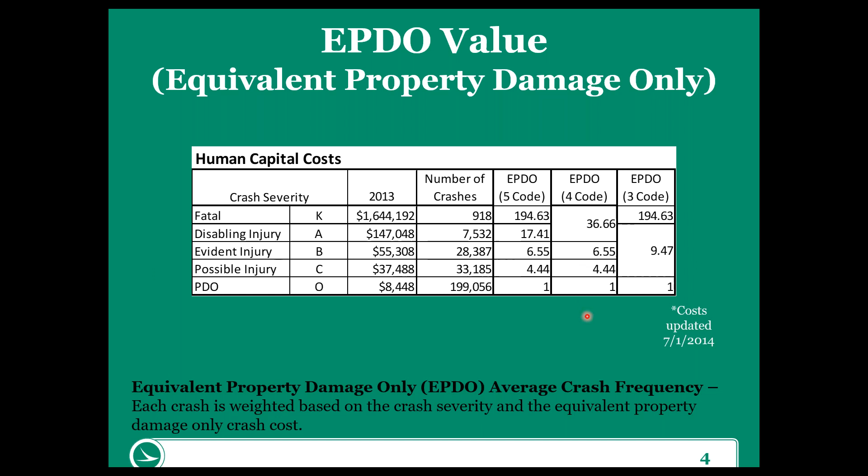So the benefit of using this in something like calculating a crash rate is that we're able to look at all of our crash data, regardless of severity, but then focus or weight things towards our KA crashes, which is the focus of the HSIP program.

So the way that we will calculate an EPDO crash rate is to come up with the EPDO value for all our crashes. We'll multiply individual crash severities times the weighting factor, and those weighting factors were what I just presented on the previous screen.

And then we're really just running through the rest of a crash rate calculation here. This first section is calculating that EPDO value, and then we're multiplying times 1 million vehicles. This crash rate is going to be crash rate per million vehicle miles. We're dividing all of that by the years that are in the study, so the years of safety data that we're after, typically 3 or 5 years, times 365 days, times our average daily traffic in the section that we're calculating the rate for, times the length of the segment in miles.

So again, we have a crash rate, but instead of just using the number of crashes or the number of KA crashes, we're using weighted values based on equivalent property damage only calculations. So why do we need an EPDO rate?

Well, it's a great way to understand the severity of the crash rate that we're looking at. It helps to use all available data, particularly as we start looking at larger network analyses where we want to make sure we're getting coverage of our calculations and rates, but we still want to skew towards the KA crashes.

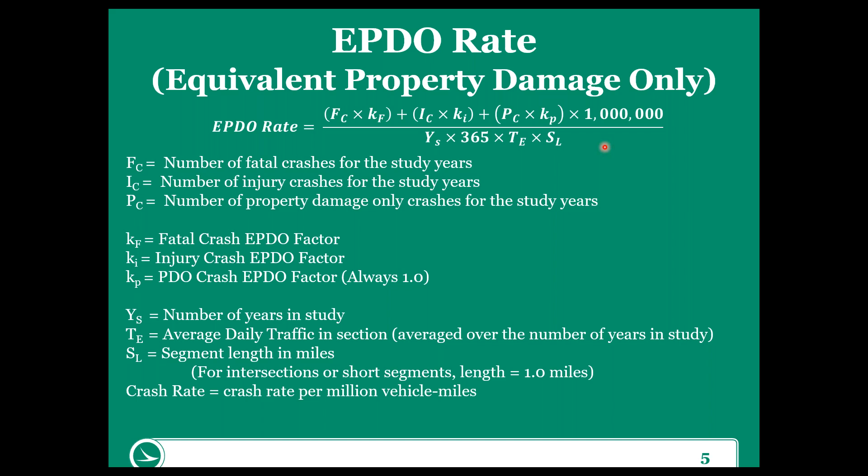All right, so moving into the actual meat of Module 4 is performing relevant traffic studies. Up to this point, we've talked about a lot of analyses, a lot of background information on the Highway Safety Manual, and how to scope out and collect data for your safety study.

One of the things we had talked about in the data collection mindset was what data don't we have. Do we have anything that tells us about queue lengths or congestion, or do we even have valid traffic data?

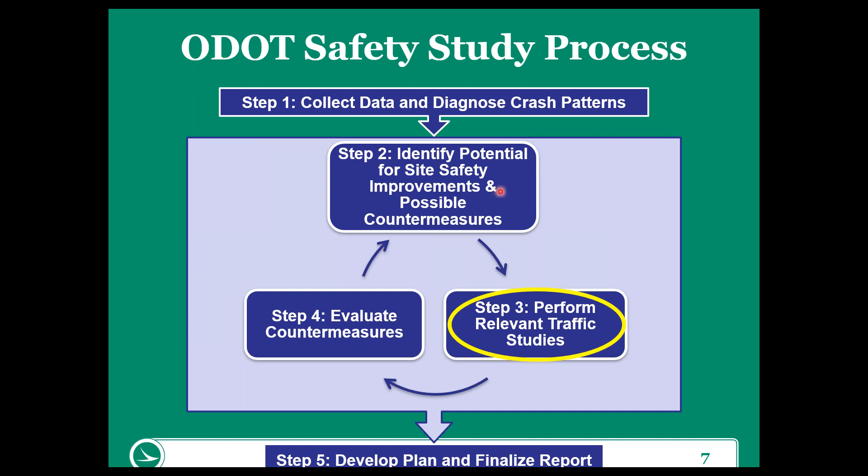So step 3 of the process is really, we've gone through safety data collection and we're diagnosing crash patterns, identifying the potential for safety improvements and potential countermeasures. We're doing that heavy safety analysis, but this is the point where we're talking about what else needs to be done at this site, maybe from an operations standpoint or in support of potential countermeasures.

So step 3 is rather straightforward. The first thing is, what appropriate studies do we need? Are we looking at a signalized intersection where we need to analyze capacity? Are we looking at an unsignalized intersection where we need to do a signal warrant analysis?

The key is these types of things, while we frequently do them within a safety study or in supplement to a safety study, are not necessarily a part of the safety study from the get-go. So again, really key that we're working with ODOT DSRTs, our safety representatives, and our local highway agency or local authorities in general.

So we want to select supplemental studies or analyses, including volume analyses, signal warrants, capacity analysis, maybe sight distance is another one. But we really want to select these based on crash patterns and existing conditions. We don't want to include a signal warrant analysis just for the sake of including it because we're already here. The idea is that this is in support of the safety study.

The other thing is we really want to focus these on locations with the greatest potential for safety improvement. So once we've identified that PSI from step 2, the additional studies really are in support of advancing towards ideal countermeasures or improvements at the sites.

And then part A of the safety analysis guidelines has a comprehensive list of studies, so definitely refer to that in preparation or figuring out what these supplemental studies should be for your site.

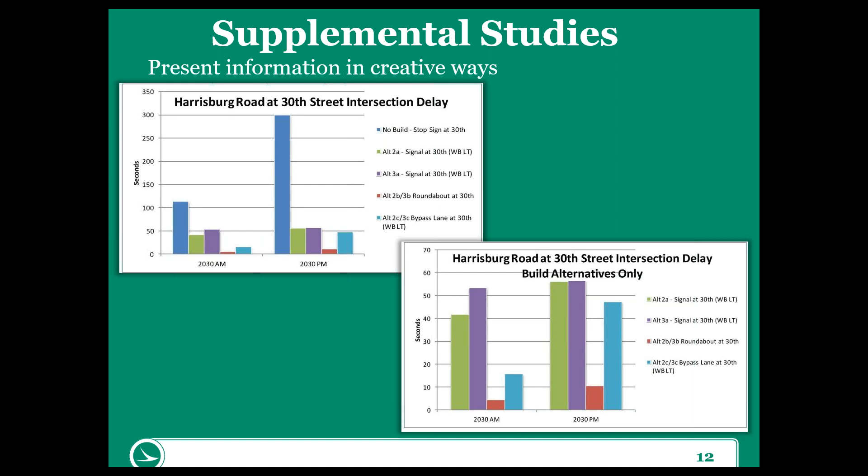Whereas that additional data, we'd look to put either in its own standalone report if it was substantial enough, or just in the appendix of the safety study.

So the big thing in step 3 is understanding what other analyses need to be completed to support the safety analysis, and then thinking about the appropriate way to document those. All along, we want to make sure we're conveying those ideas on what studies to do and how to incorporate them with the DSRT and the local highway agencies.

In some cases, step 3 may be known when we look at the crash patterns or when we're collecting data from the get-go. It may not be a linear process where we've gone through step 2 and now we're thinking about step 3. It may very well be that as soon as we get to a site for a field visit, it's clicking that we've got backups occurring in consecutive intersections or something where we really need a better understanding of the operations. Having a full understanding of this process really helps to get ahead in the right way.

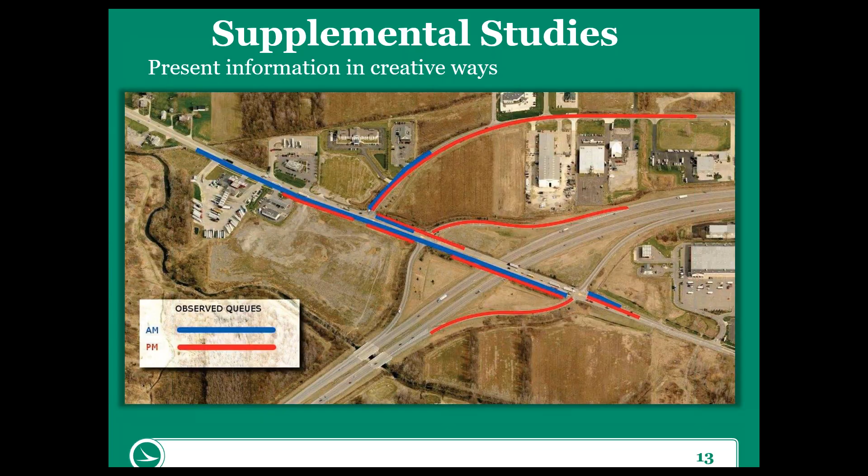Step 3 could be completed in a linear fashion, or maybe we're doing this even before we get to the safety analysis summaries, but again, we're supporting the overall safety study process.

Step 4 is to identify and evaluate countermeasures. Step 4 is the last in our continual cycle of trying to come up with our final plan. It may be we've done a relevant study, we think we have an idea of the correct countermeasures, we go to evaluate them, and the results weren't exactly showing us what we want. So then we can come back through this cycle until we've identified potential recommendations and treatments to address our safety concern.

So step 4 is another step back into the highway safety manual. The overall goal and procedure we're looking at is modifying that crash prediction based on traffic engineering study results by adjusting Part C CMFs or adding Part D CMFs.

I know last week there were a couple of conversations over Part C CMFs and Part D CMFs, and that's totally normal, particularly if you're seeing this for the first time or haven't worked in the highway safety manual. Part C versus Part D CMFs is a common, I don't want to say tripping hazard, but it's something that's been acknowledged, the wording wasn't quite right in the initial HSM and it's being changed. But hopefully as we go through, particularly the example in ECAT in a few minutes, everything will fall into place.

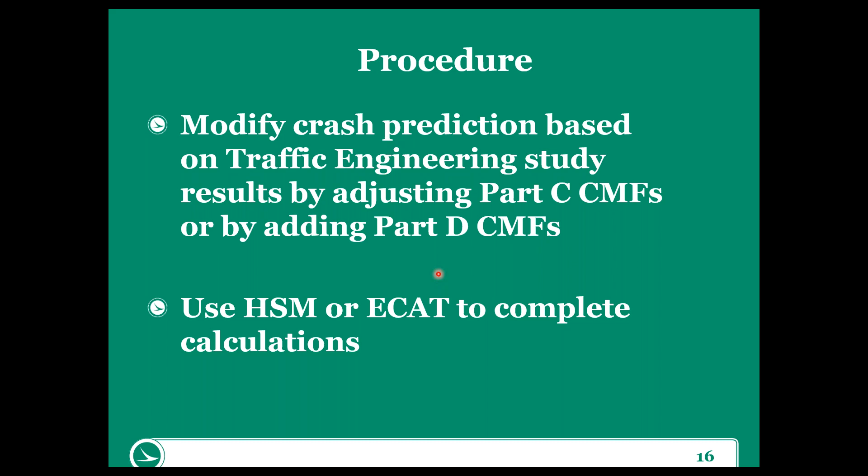But basically what we're trying to do is say we've modeled our existing conditions. Now we're going to see if we change certain variables or implement treatments at a site, how is that going to change our predicted safety performance at our individual site. So again, we're going to rely on the Highway Safety Manual, or here in Ohio, we have the benefit of relying on the ECAT tool to guide us through the HSM process to complete the calculations.

Again, the goal is that we want to lower the expected number of crashes so that it goes below the predicted. So we talked last week about PSI, and we'll go over it again in a minute, but the goal is to really address that potential for safety improvement.

One of the ideas we want to start incorporating when evaluating our countermeasures is the benefit cost analysis. In a lot of circumstances, the limitations on improvements at a site are related to the costs. Are the costs going to outweigh the benefits in terms of reduced crashes?

From that standpoint, when we start making recommendations, we really do want to start with our low-cost, short-term improvements: signing, signal timing, pavement markings, pavement friction to a certain extent, and vegetation removal - things that can be quickly implemented at a lower cost. If those show a positive reduction in crashes, we definitely want to make sure those are implemented first.

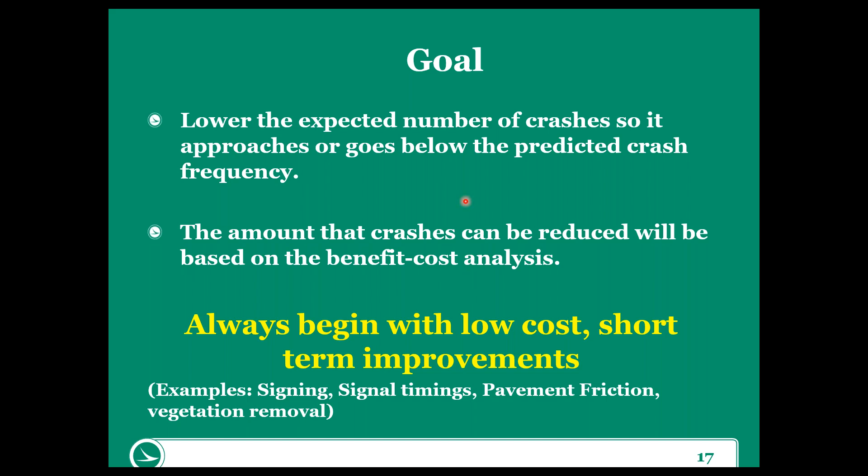This is a quick refresher from the predictive method on last Friday. Step one was to determine our data needs and identify our individual HSM sites. The step in actually calculating crashes was, number one, we calculate a predicted number of crashes based on the site type for the base conditions. So if we're talking about a rural two-lane intersection, we calculate the predicted number of crashes for an average typical base condition site.

Next, we calculate the predicted number of crashes for our particular site by adjusting some of those base conditions to reflect what's actually out at our specific rural two-lane intersection. Then finally, we incorporate that historical observed crash data to come up with an expected number of crashes for our particular site.

Step three is where we start to incorporate the crash history using the empirical Bayes method to get the expected number of crashes. As we'll see in a few minutes, ECAT helps to complete steps 1, 2, and 3 almost simultaneously. It really makes the process very simple and approachable.

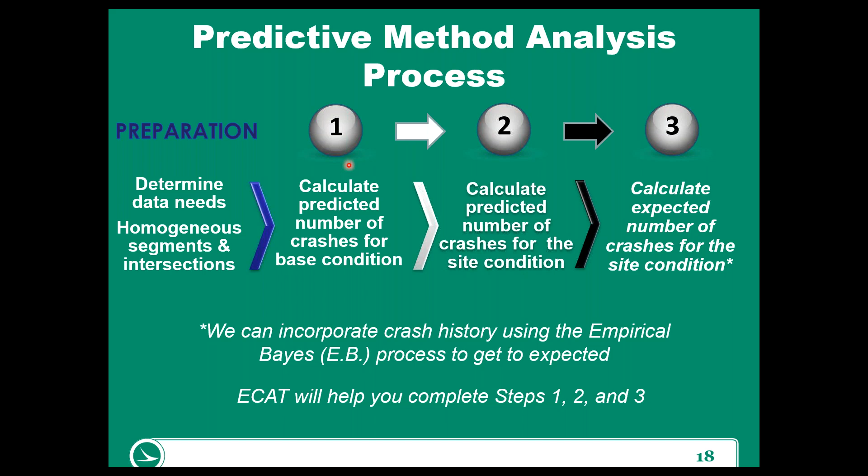So we previously mentioned PSI - potential for safety improvement. If the black line is the predicted crash frequency for our site that we calculate after step 2, when we apply our observed crashes at the site, it helps us adjust that prediction for our particular site.

This is really the best of both worlds because we're saying how did the site perform on average for typical sites, and then by incorporating the observed crashes into that expected average crash frequency, it's saying how is this particular site performing compared to what we would have predicted? So when we incorporate the observed crashes through the EB method, if we're seeing that the expected crash frequency is higher than the predicted, then we have excess expected crashes, or a potential for safety improvement.

Likewise, if we have a very few number of observed crashes at our site, it may adjust the expected average crash frequency below the predicted value. In this case, we don't have that potential for safety improvement. What we're saying is this site is performing better than we would have predicted.

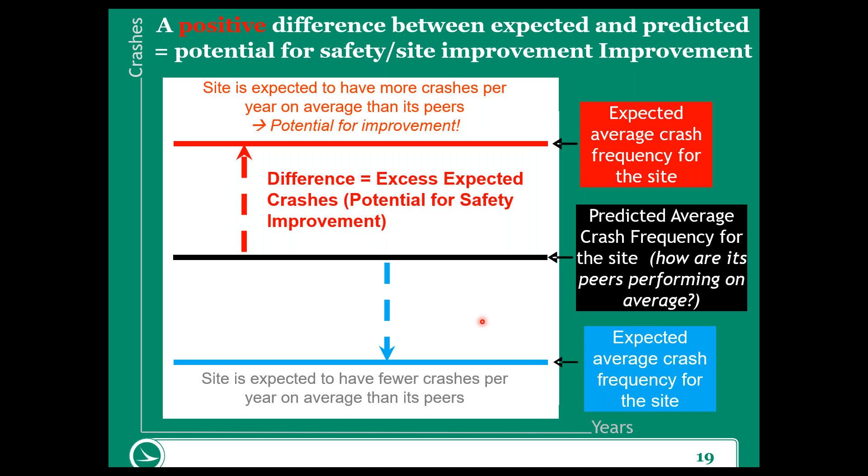And so we had previously mentioned, once we have that baseline safety analysis done, what we're going to look at is how can we try to improve safety performance at our individual site. What we want to do is say, well, what treatments can we implement here?

And the way that we'll model treatments is kind of twofold - it'll be through observed, and it'll be through the implementation of crash modification factors. So we're going to get back to the Part C, Part D CMFs, but basically CMFs, crash modification factors, are ways to say this is the proven safety benefit, or this is how this safety treatment has a proven benefit for a given installation.

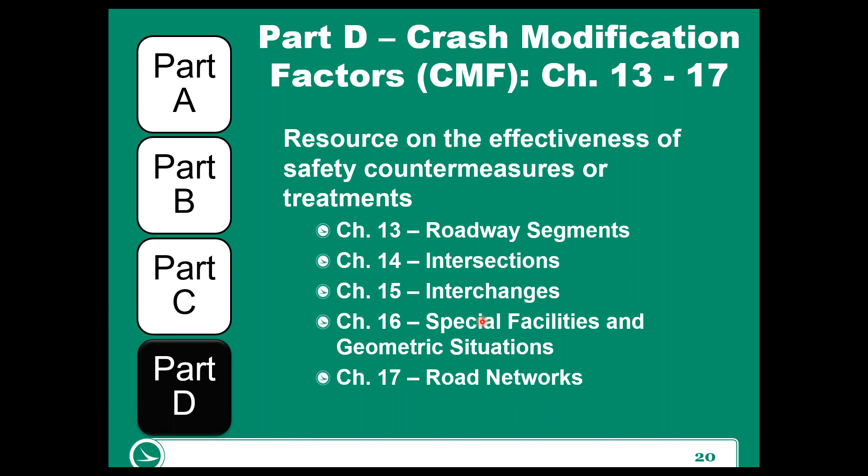Part C CMFs, when we talk about adjusting and proposing conditions, really has to do with our specific HSM site type. Part D CMFs, again, don't apply to adjusting the predicted value - it's a treatment that we apply to the expected crashes at the very end. Part D CMFs, you'll see in a second, we could also apply to observed crash history if we can't go through the predictive method.

So kind of jumping off from that point, there are different methods for estimating safety effectiveness. As this list increases, we get into more reliable estimations of what the estimated safety effectiveness will be for a given treatment, or for a given implementation.

So the very bottom of this list, we see observed crash frequency and Part D CMFs. If we have a site type that doesn't have an HSM predictive method yet, we can take our Part D CMF, which comes from the Crash Modification Factors Clearinghouse primarily. We can say, okay, if we install flashing beacons at this site type, the CMF Clearinghouse says we'll have a 25% reduction in crashes. If we don't have an applicable HSM site type, we can apply that directly to our observed crashes.

However, applying directly to observed crashes doesn't really account for things like regression to the mean bias. It doesn't give us the most accurate depiction of our site safety performance. And that's the reason why we like to go through the EB method.

So the next more reliable method would be looking at just the SPF. Let's just look at the predicted value for crashes here and not incorporate observed crashes, and then apply our Part D CMFs. The reason why we would do this is if we just don't have any crash data available—we're not sure if it's incomplete, if it's missing, or what. But we can use just the SPFs and apply Part D CMFs to get an idea of how the predicted safety performance could be improved.

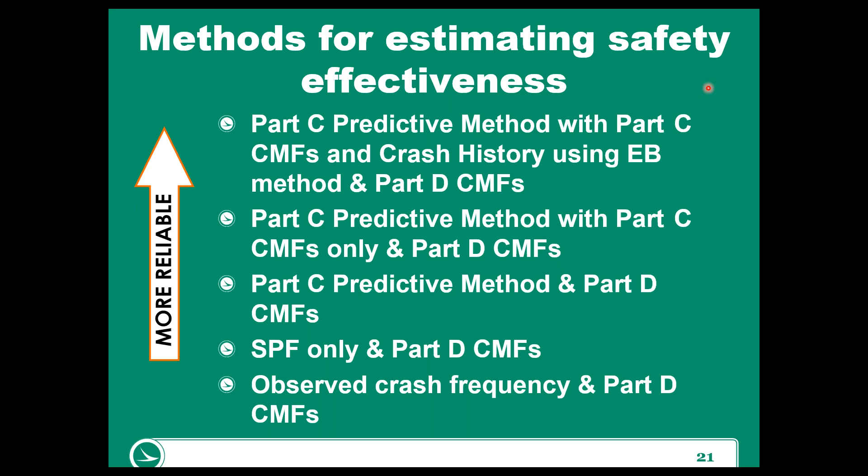So it's a lot of different language being thrown out there, and it might seem like the menu is really long in terms of understanding how to evaluate countermeasures, but hopefully we'll see here in a few minutes through the use of ECAT, going through this a few times, that it's actually more complicated to try to explain the different variations than it is to show you how Part C and Part D CMFs play together to show how a site implementation might improve our crash frequencies.

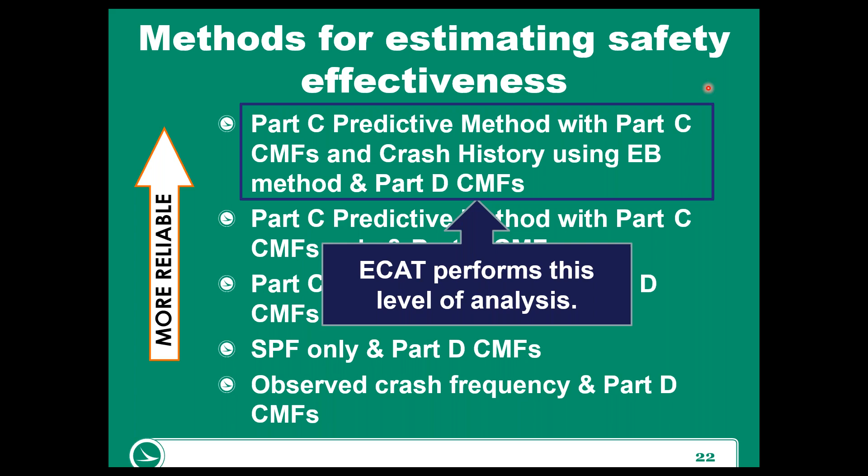So one more time, just going through the difference between Part C and Part D CMFs. Part C CMFs are developed in conjunction with the SPFs for base conditions and are used to adjust base conditions to site conditions. Part D CMFs estimate the effectiveness, or the expected change in crashes, as a result of implementing countermeasures. Part D CMFs include Part C CMFs, but Part C do not include Part D.

So Part D, we only want to use when we're talking about implementing countermeasures. We don't want to use that in terms of adjusting our site prediction to what's out there in the field. Whereas Part C, we use those to adjust base conditions to our site conditions, and we can also use Part C, if available, to show proposed treatments.

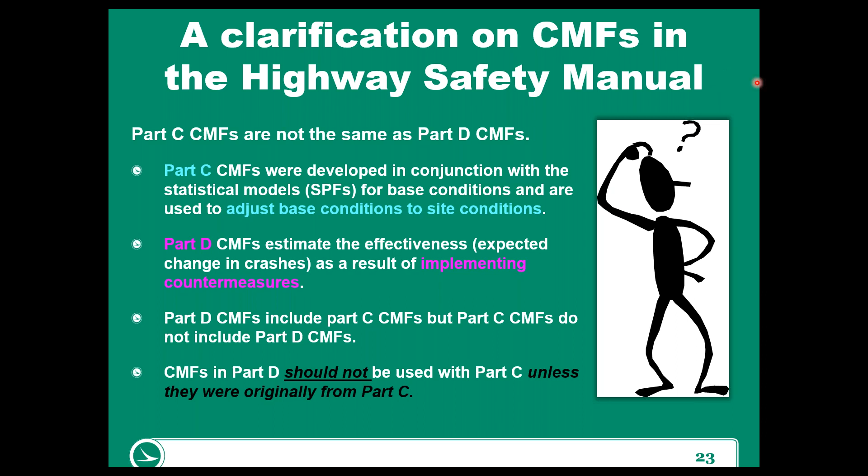So one last time: Part D countermeasures are only applied to the proposed conditions, where Part C works both ways—it can apply to the existing and the proposed. And luckily, again, we have ECAT to really walk us through how to incorporate Part D and Part C CMFs.

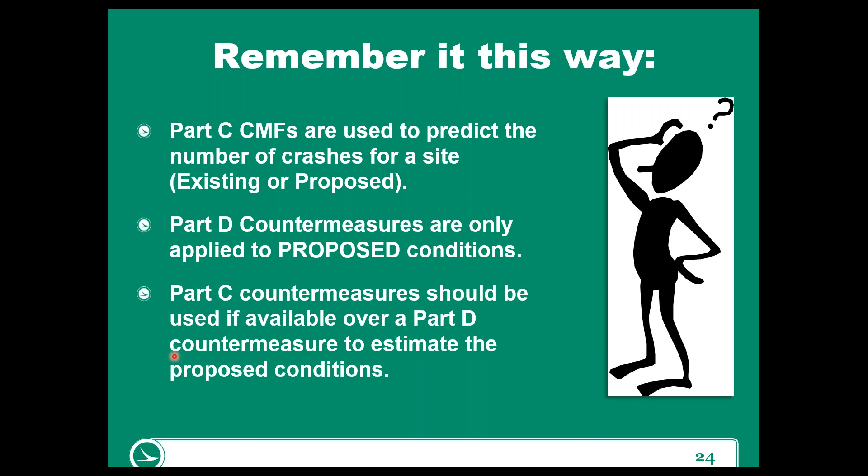I don't recall what you were saying at that specific time, but did Alex say Ohio uses the EPDO 3 code factors for the EPDO rate calculation? Sure, so...

Good question, thank you for letting me come back and clarify. I think we're referring to this chart right here, and this shows a couple of different ways that we could look at EPDO, where each crash severity could have its own factor or its own code, so its own weighting. Ohio currently, as the safety analysis guidelines are written and the way we look at scoring benefit for ECAT and things like that, we use the 4 code. So we're grouping K and A together, and then B, C, and O have their own weighting values.

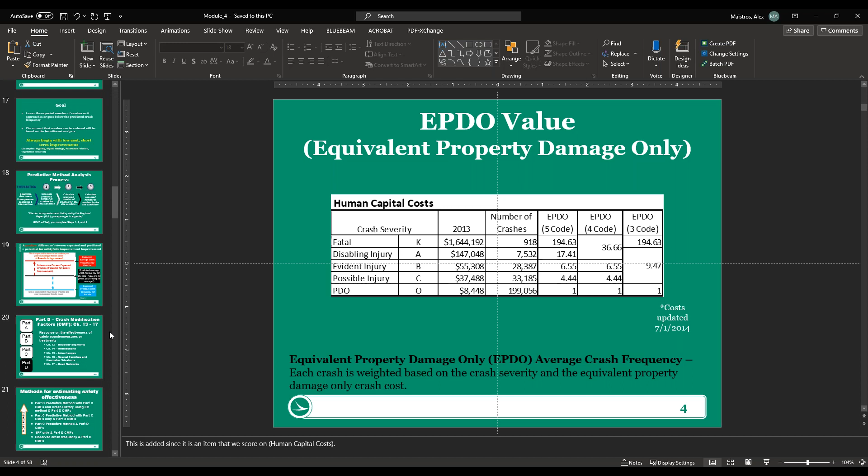So right now, what I want to do is run through an ECAT analysis from beginning to end almost. I know normally this is a really interactive part of the class, so I really encourage you, if I've gone too fast or anything like that, or if I'm clicking and things aren't lining up, or if you just got a question on exactly how something popped up or where it was, please throw a chat in there. And then I'd encourage Cindy, Mike, interrupt me as much as we need to make sure we're getting this kind of interactive discussion on using the ECAT tool.

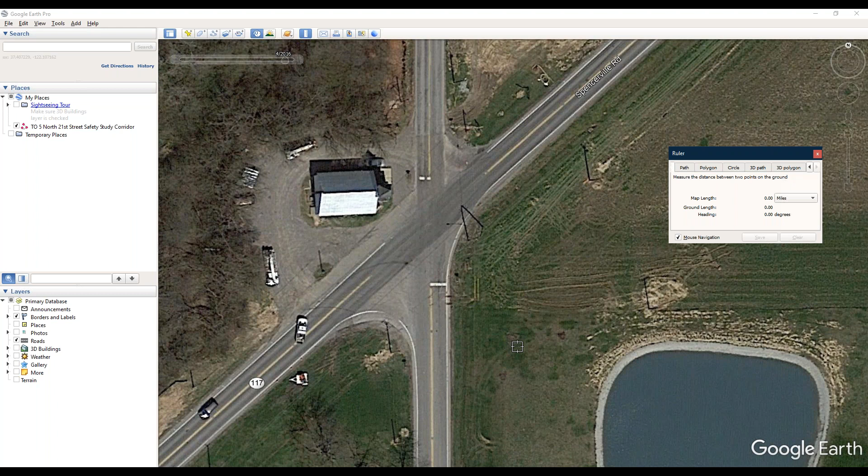Alrighty, so the example we're going to run through is out in Allen County, State Route 117 at State Route 501, Spencerville Road at South Wapakoneta Road. This is one of the examples available on ODOT's Safety Analysis Guideline website, so if you need to refer back to it in the future it should look pretty familiar. I have updated to the newest versions of ECAT and the CAM tool, which we always want to make sure we're doing.

All right, so this is our site, this intersection. I guess for a little bit of context, you can see we are just slightly south and really west of Lima out in Allen County.

This tool, this site actually has been updated, so the updates we're going to run through have actually been implemented at this point. But luckily we can use ODOT historic, or Google historic satellite imagery, to kind of show what the site looked like. So this is back in 2016. For the sake of this example, we're going to pretend we're doing this analysis in 2016.

And so what we have is the main line of a rural 2-lane intersection. The site is pretty easy to identify, we're definitely in a rural area, you can tell by site context. Also in the field, you also want to verify that your site types are right. So if we got in here and there was lots of curb and gutter and sidewalks, despite the fact that things look pretty rural, we would want to start having that conversation over what's the best way to capture these site conditions. But this is a rural 2-lane intersection.

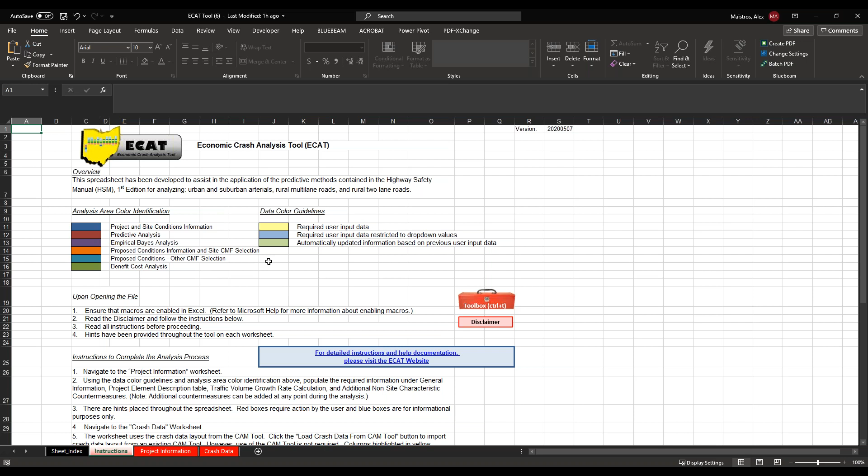All of this information on the front landing page, on the instruction page, is super helpful to remembering how I'm supposed to do everything, but I'd say the real magic begins here on the next tab, which is the project information tab.

I have filled in a few bits of information here just to make sure that we end up at the right place. But basically, when we're looking at our site, we know that we want to widen for some left turn lanes and we want to realign to correct the skew angle.

And then we're going to also add some flashing beacons so we can see how the Part D CMFs play in. So make sure that we're putting in all the above information. Always make sure the contact information is included. These tools often get passed on to our local partners and then to district or central office, and it always helps to know who is the point of contact for developing this information.

So yellow in the ECAT tool indicates sites or cells that we need to input information. Blue indicates sites that are pre-populated, but we have a question that we need to answer, or we need to select an answer. So the first question is, are we going to perform benefit cost analysis?

Since we're going to run through an entire study, both from identifying PSI and then we'll look at implementing countermeasures, for the first go around, we're going to say no. At this point, we're just going to evaluate our existing conditions and determine what is the PSI for our site.

And do the proposed improvements fundamentally change the conditions of the base performance, or the base safety performance function, or is crash data unavailable, or is only the predicted analysis needed for the existing proposed condition? I'd previously run through this slide on the different ways to evaluate countermeasures, and this question is a much easier way to digest how we're going to evaluate these countermeasures.

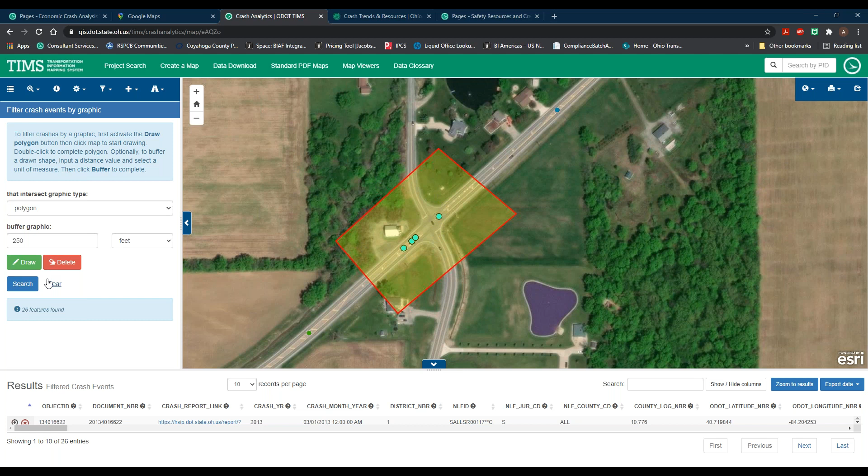Let me clear out the crash data. But if we want to pull our NLF IDs for our roadways, we can go to road inventory layer in TIMS, and we'll see the different colored lines appear.

Now, to actually figure out what the NLF IDs are of this road, we can hit the identify features button and then just click. So if we click on our major leg at 117, we can see that our NLF ID is the second value listed here.

Now, this is a great example of why it's good to go into TIMS and make sure that we are confident with what we're dealing with. The southbound version, or the minor leg to the south, I should say, is State Route 501. So it's State, Allen County, State Route 501. But on the north side of the road, it's actually Township Road 91.

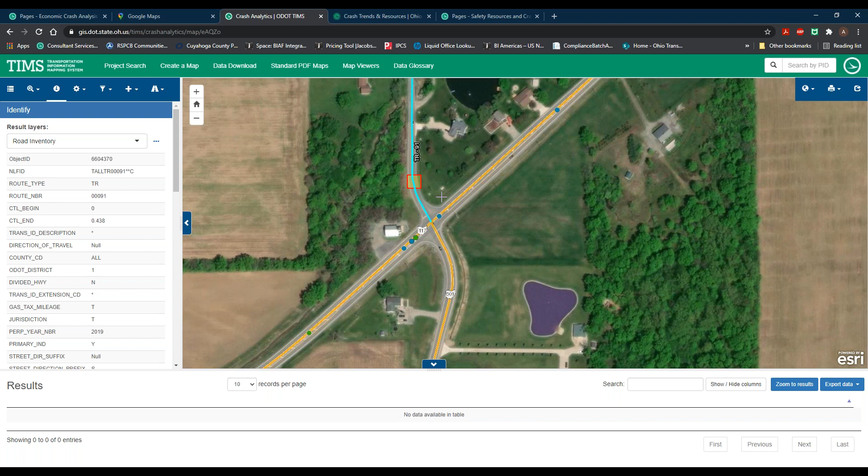This is important. Again, we're going to be pulling the information for the crashes to associate to this site in a minute based on NLF ID. So we want to make sure in ECAT, we have the major leg as State Route 117.

But as far as the cross route IDs, we actually want to type in both. So you'll see if we hover here, we get this helpful hint from ECAT that says add up to 5 cross route NLF IDs to assign side street crashes to a project element. And we're going to separate each NLF ID with a single comma, no spaces or anything. So here we've got the State Route 501 NLF ID and our Township Road 91 NLF ID separated by just a comma.

All right, so that is as technical as it gets for defining our site types on this page. The last thing that we want to do is just give it a common name. The common name really just a way to help us remember and understand which site we're looking at. If we have a corridor or a project that we're analyzing that has a lot of segmentation in it, the common name can really help us remember kind of where we're at as we go from tab to tab, as you'll see in a few minutes.

So State Route 117 at State Route 501 / Township Road 91. Alrighty. So we have our one site. All we're going to do is analyze the intersection at this point.

We have a couple different options. So we have a toolbox up here, which, if I load it, the toolbox shows us in order some analysis processing steps. The first one is load crash data from a CAM tool. The second is to assign crashes automatically to project elements. Third, we'll add or remove analysis worksheets. And the fourth is to create project summary reports and benefit cost analysis.

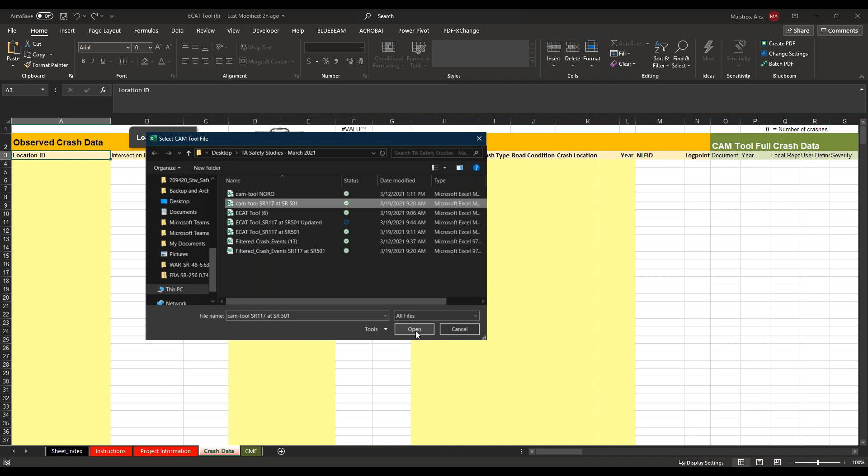But once we save that tool, now we're going to make sure that it's handy and we don't just get rid of it, because we're going to use that to import the crash data into ECAT. So when you hit OK, we'll have our file manager pop up, and then we look for the CAM tool for State Route 117 at 501. We'll hit open.

So then we'll get a notice that crash data is loaded. You are ready to assign crashes to elements.

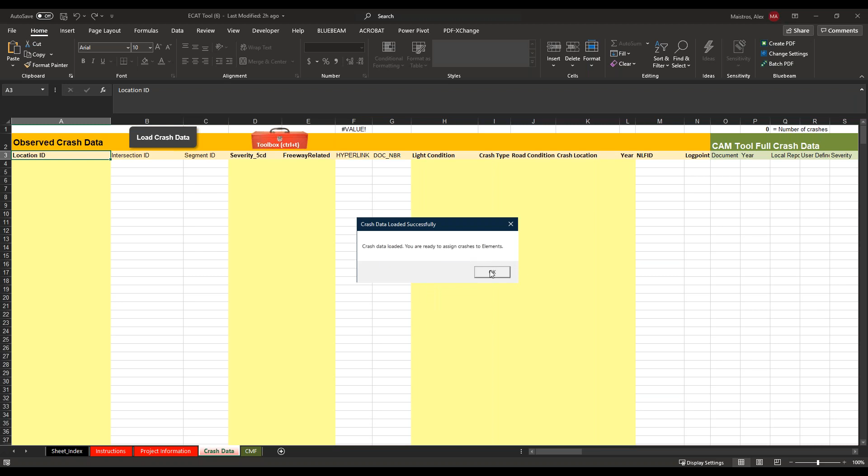Alright, so we see this is our crash data. If we were to open up the CAM tool, we could verify this. One friendly user tip: don't have the CAM tool open when you're trying to import the data into the ECAT tool. Sometimes it can cause an import problem, so it's best to just close out of the CAM tool during the import process. Then if you need it back open, just go ahead and open it back up once the crash data is loaded.

At that point, the data is in ECAT. It's not like we're reading data from the CAM tool still, so they're totally separate tools as soon as the data is imported.

Alright, so once we have our crashes in here, the next thing that we have to do is assign them to the project elements. And what we mean by project elements, if I go back to the project information page, you'll see all the way to the left of this project element description table is project element ID. This is automatically created as we typed in the site type, selected the site type, selected control type, and then entered our common name and a log point, and that's really what populates this element ID.

Each element that we have defined here will have its own unique element ID. So more or less each site type within our study is going to have its own element ID. So what we need to do is assign crashes to the particular sites within our entire study. We can do this manually by entering the name of that unique element ID, or we can open up our toolbox.

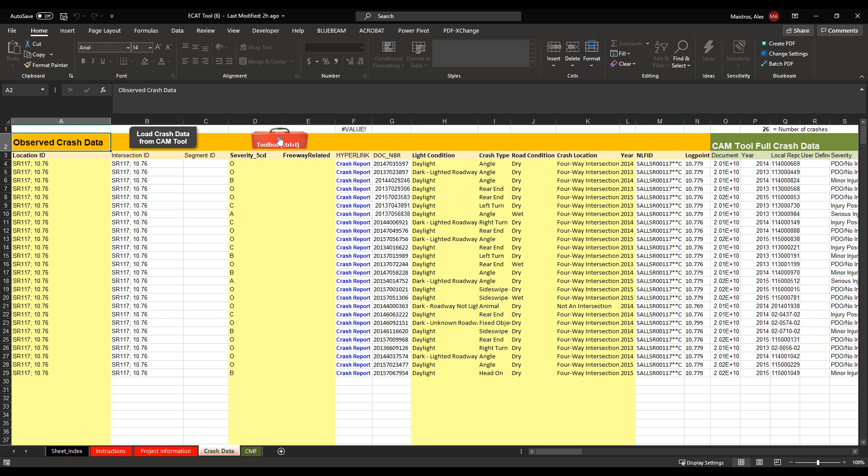Alright, so once all of our crashes are associated to the correct intersection or segment ID, the next thing that we want to do is generate the actual site analysis sheet. So we'll open up our toolbox again, and then the third button down in our analysis processing portion of the toolbox is add or remove worksheets. If we click this...

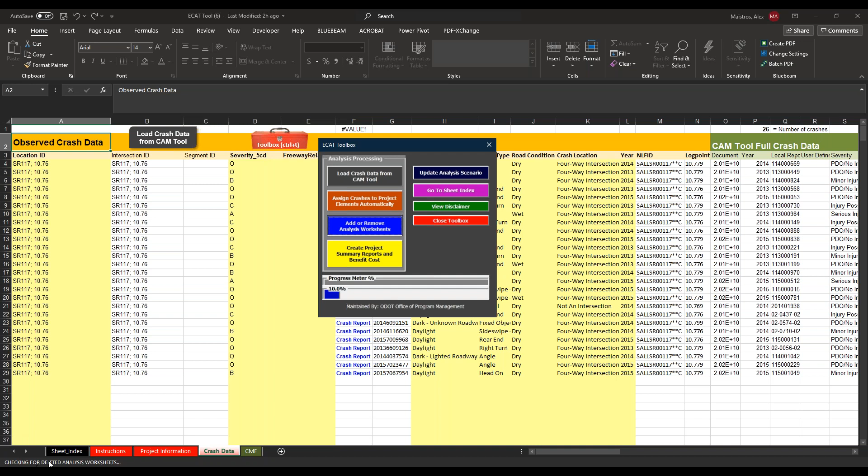We'll see the screen kind of updating. We'll get some messages down here in the bottom left-hand portion of your screen. Always keep an eye on this. It may look like your computer's not doing much, but if there's ever a note down here saying what's going on, we want to make sure not to interrupt the macros as they run.

Alright, so the macro has run completely. You'll see we have a new tab in brown down here, and it's kicked us back to our project information tab. So going back to the project information and seeing our new State Route 117 tab indicates that the macro ran successfully. So what we want to do at this point is go through each of our individual sites, or in this case our one site, and fill in the appropriate information for that site.

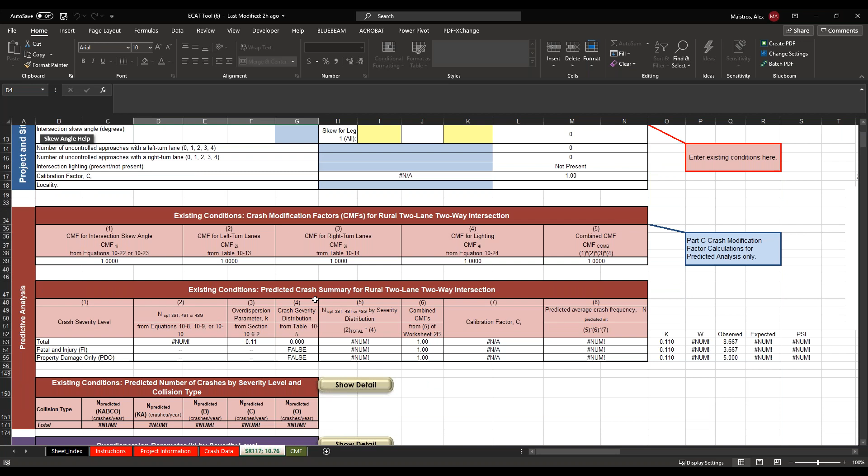Within the element tab, or each individual site's new analysis tab, there's a lot of information going on. At the top, we have the information that we input into the site information, or the project information tab. We have another set of boxes down here with some blue and some yellow input boxes, so we know we're going to need to do some inputs here. And then we've got a lot of information in terms of numbers and formulas, and a lot of detail that we can show with different color coding.

I think the great thing about the ECAT tool is, in terms of inputs and checks and balances and anything along those lines of implementing the HSM, we're really just concerned with these blue and yellow input boxes at the very top here. So this is one of the great ways that ECAT has simplified the implementation of the HSM.

So we have these different checkboxes, or these different inputs to go through. Note that each site type is going to have slightly different requirements in terms of inputs that we have to enter. So when we know our site types at the very beginning, when we're scoping this out and collecting our data for the EB process, we need to make sure we're going to have the appropriate data through our data collection process to answer these few questions here.

So we know the intersection type is a 4-leg stop controlled, or a 3-leg stop controlled is the other option. If you're not sure exactly what we need to put here, go to the Highway Safety Manual, but also, as we select an option, so we selected the 4ST, we can see we have an unsignalized 4-leg stop controlled on minor road approach pop up here in column P. If we switch it to 3-leg, this updates to an unsignalized 3-leg stop controlled on minor approach. So we do get some helping hand from ECAT, but ultimately we're just trying to simplify the HSM. So we know this is a 4-leg stop controlled intersection where the minor road approaches are stop controlled.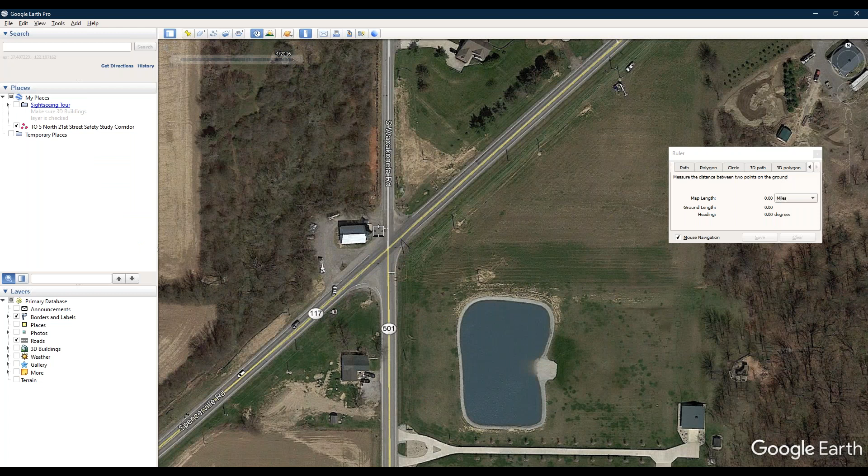So then the skew angle for leg 1, we're going to call this about 45 degrees. No need to bring the survey crew out, a reasonable closest answer will work. We can see that's about 90 degrees, so we're really bisecting that 90 degree, so we're going to call it 45 degrees. And the skew for angle 2 is also 45 degrees.

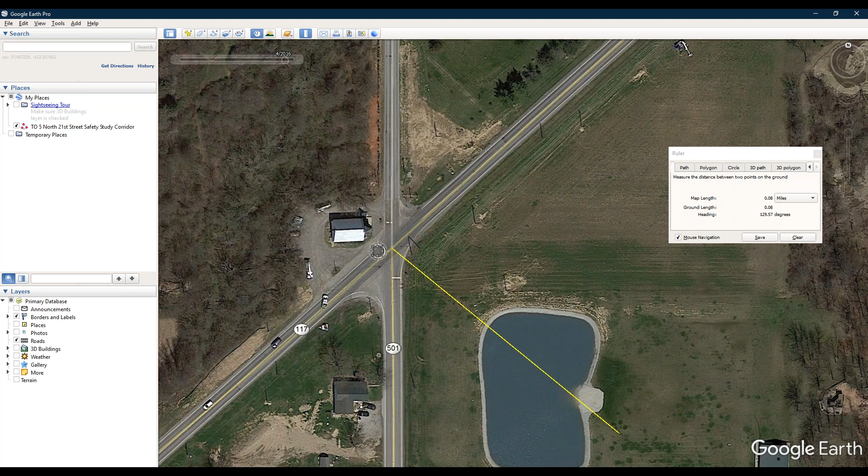Next question is, what is the number of uncontrolled approaches with a left turn lane? As we look at our major and minor legs, you can see we don't have any turn lanes, right or left, on the uncontrolled approaches. So that's 0. And again, the number of uncontrolled approaches with a right turn lane is still 0. There are no turn lanes present in the existing conditions.

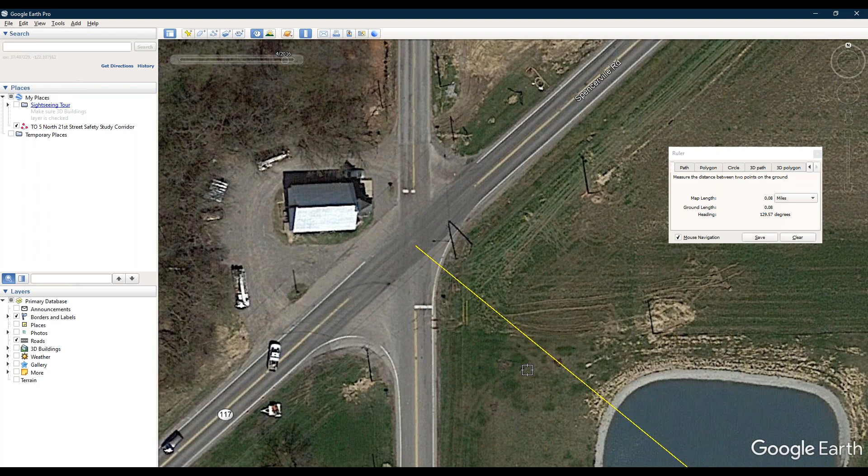And intersection lighting - it looks like there might be a cobra head here for intersection lighting. We have no lighting present as the baseline condition that we're showing, based on the street view we had at the time. So we're just going to say not present.

And the last question we need to answer is, what is the locality? Is this on the state system or off the state system? Because we have an intersection of 2 state routes, we know it's on the state system. If you're unsure about that, feel free to reach back to DSRT, or TIMS is really great in terms of helping, because we can look at all the NLFIDs entering an intersection or a segment.

All right, so we've answered all of the input boxes here for our site. So the question is, now what? We had a lot of calculations that we were supposed to do according to the HSM: find our base data, calculate the base prediction, calculate the prediction at the site, calculate EB. So in terms of data input and figuring out what to apply to each of our sites for the existing conditions, that's as much information as we really need to input before we can understand the analysis of this.

So a lot of information in the HSM, a lot of information on how to apply the predictive method in Part C, but really it comes down to collecting the right data and inputting it into these data cells here in ECAT.

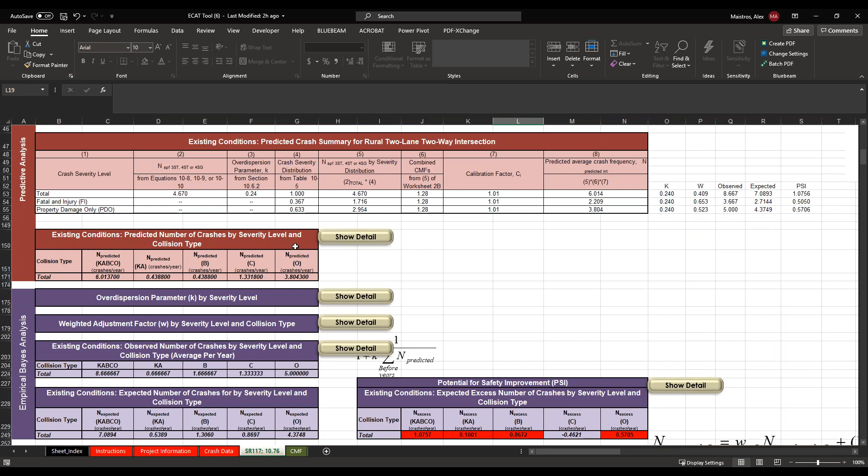So one thing that I wanted to point out at this point is, what about all of this stuff? We have all of these red, these purple, eventually we'll get to orange cells, and these are all cells that are carrying formulas that we need to work through. So as we change variables and input variables into this section, these calculations will all populate and update.

In terms of applying those Part C CMFs, that's what is populated when we enter some of this information. So the very next line down here, you can see we have the Part C CMFs that we're applying to this location. We didn't have to go out and select the Part C ones. We didn't have to worry about how to apply them. All we have to do is focus on answering these relatively simple site questions.

But you can see that we have a CMF populated for intersection skew angle. If there wasn't one there, if there was no skew, you can see that our CMF is 1.0. But because we have that skew of 45 degrees, you can see that we're indicating that there is going to be an increase in crashes. So that's how we apply Part C CMFs.

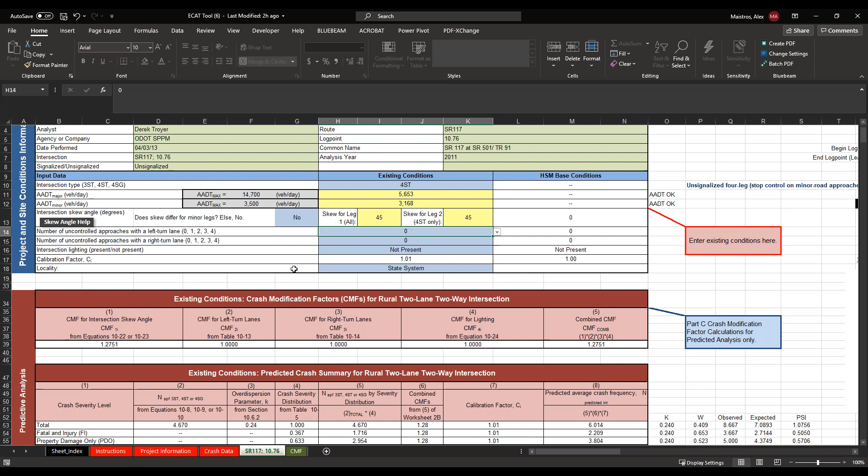So as we're talking about the baseline safety analysis, if we want to get a report of what is our PSI, right? We've done the data input. Technically at this point, we've done all the information we need to understand our existing conditions. We can create project summary and benefit cost analysis. So if we click that last button in the toolbox after we've inputted all of our information,

we'll get a note that says the required summary reports have been generated, and it'll take us to the report site. So at this point, we've completed our baseline analysis, and this is how the HSM Part C kind of is done in ECAT and reported back to us.

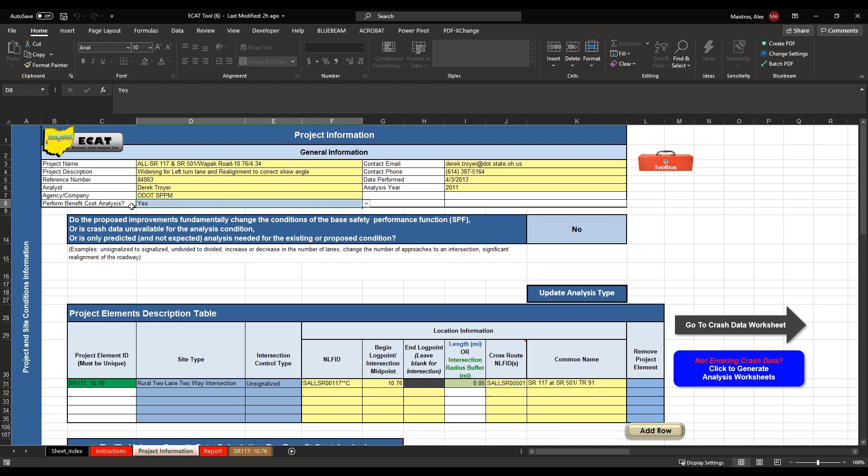So again, we want to talk about widening left turn lanes and realigning to correct skew. So the way that we can do that is, let's quickly just say yes to our benefit cost analysis. So we can do a benefit cost analysis directly in ECAT. One of the things that we need is a traffic growth projection. Just input some base data here. You can get all of this information again by talking with district and understanding how the site is intended to grow.

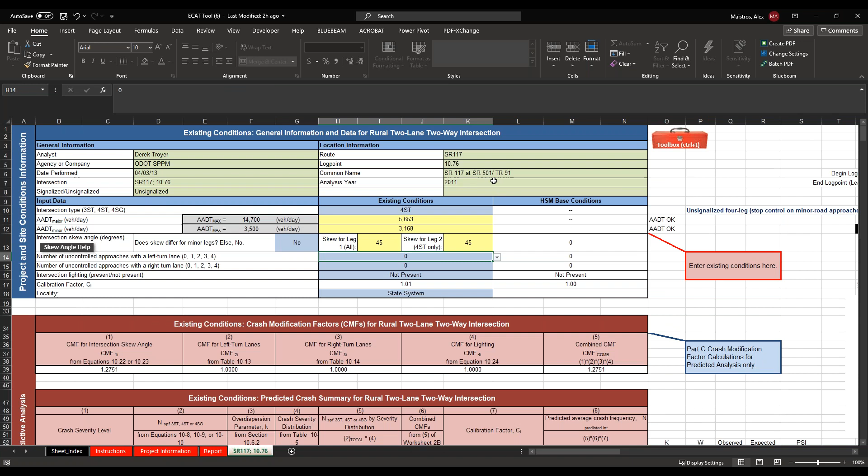All right, this popped up because we hit yes to the benefit cost analysis. So now if we go back to our site, nothing's changed here, but as we scroll through, we get to the reds.

The purple section is actually the calculation of our EB stuff. And then we get to this yellow, which is the exact same field we saw above, but now we're talking about proposed conditions.

So here is where we can start to say, okay, we're going to add left turn lanes on the major approaches. That's something we're going to implement in the proposed conditions, so this is how we're changing the site conditions in the future. We're also going to realign to remove this skew, so we'll get rid of that. Again, we're talking about the proposed conditions specific to this site in the EB process.

Now if we go back to our report, we didn't have to rerun anything. It's all updated automatically. By making those adjustments, adding those left turn lanes and realigning to remove the skew, our proposed conditions are now showing an expected average crash frequency of 2.9 crashes per year.

And the goal of saying if these countermeasures will be effective is, is that less than the predicted number? Before, our expected was above our predicted. If we implement these changes, our expected will be below our predicted. So that's how we can tell these countermeasures seem to be effective in addressing the crash problem.

The other thing we want to talk about is the benefit cost analysis. So quickly, if we recreate the project summary by clicking that yellow button again, now that we've checked benefit cost analysis, we'll get a few new sheets pop up for us. One of them is our benefit cost analysis sheet.

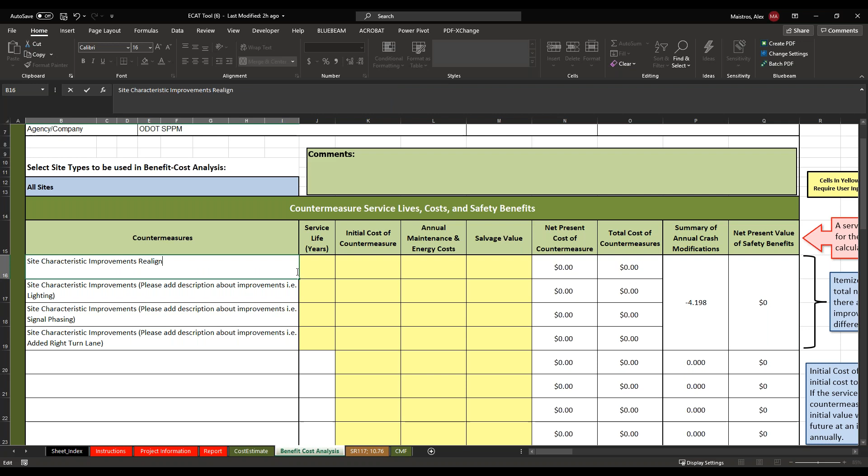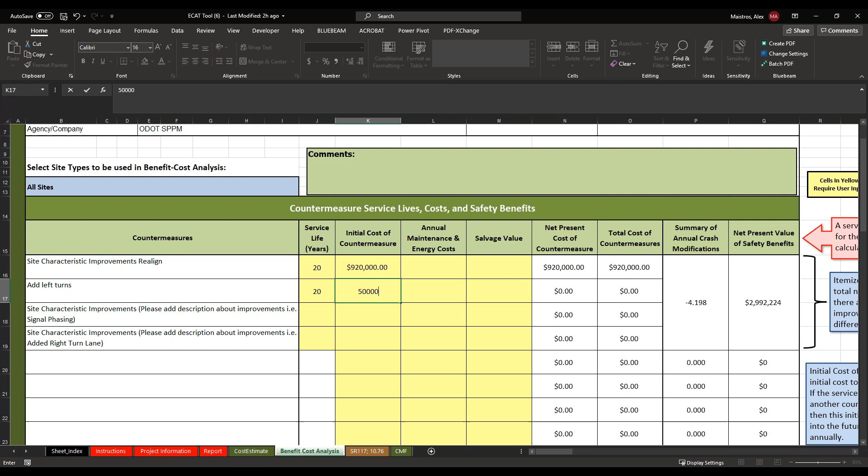So what we can do is come in here and say, what did we do at the site? The first thing we did is realignment, and then the second thing is add left turns. We need some basic information on service life and some basic information on costs, so we'll say 920. Then we'll actually end up with a benefit cost ratio for this site.

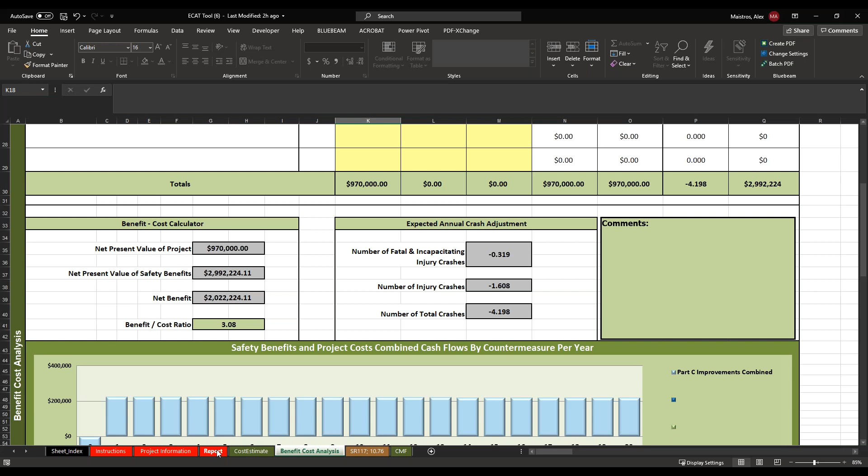So we'll say, yep, we know from our report that this will reduce our expected crash frequency below the predicted, and then we can implement some basic financial information on the project, and we'll say, yep, we can understand that there is a positive benefit cost ratio. Figuring out the cost of the benefits and all that, ECAT will take care of that for us.

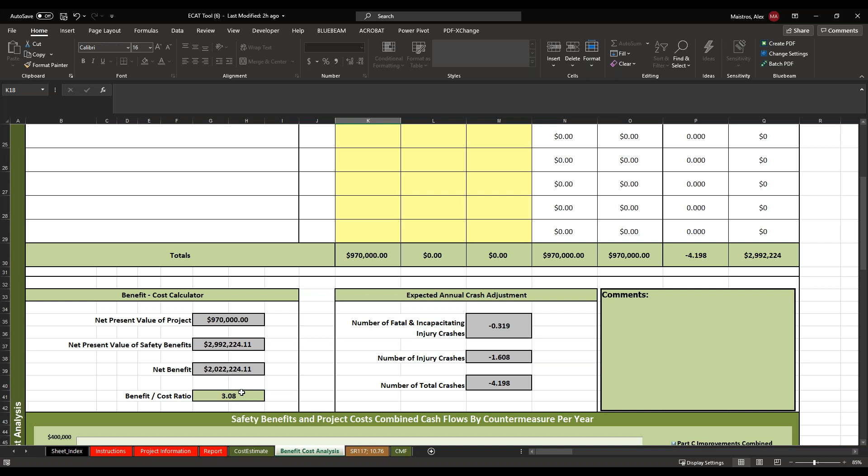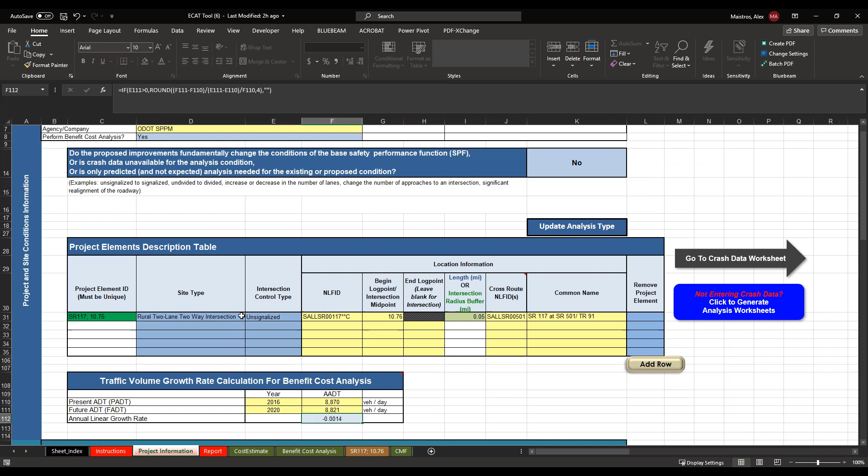Both of these implementations are Part C CMF implementations, because they're things we can adjust in the site-specific calculations. If we wanted to look at a Part D CMF, we'd go back to the project information tab, and below our project element table and traffic forecast table, we have other non-site characteristic-based countermeasures. We can scroll through these and see these are our Part D CMFs, things that can't be captured with the Part C CMFs.

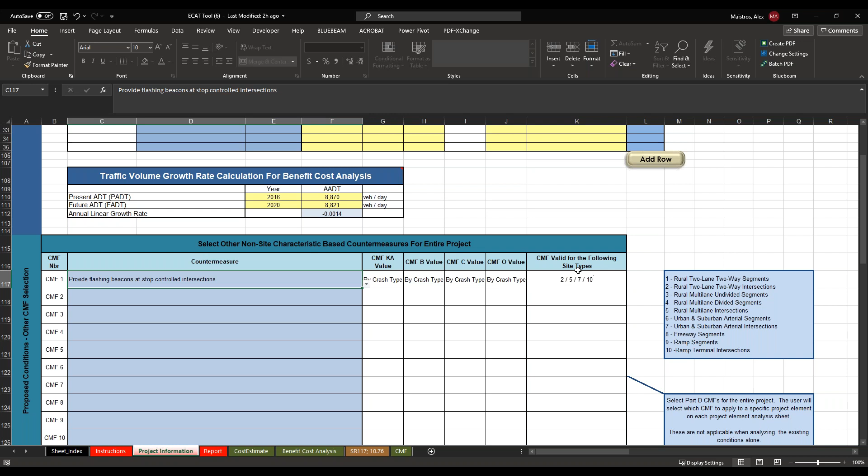So we can pick one - let's look at providing flashing beacons at a stop-controlled intersection. If we select that, some information pops up here telling us what sites we can use this at, and there's a little code here.

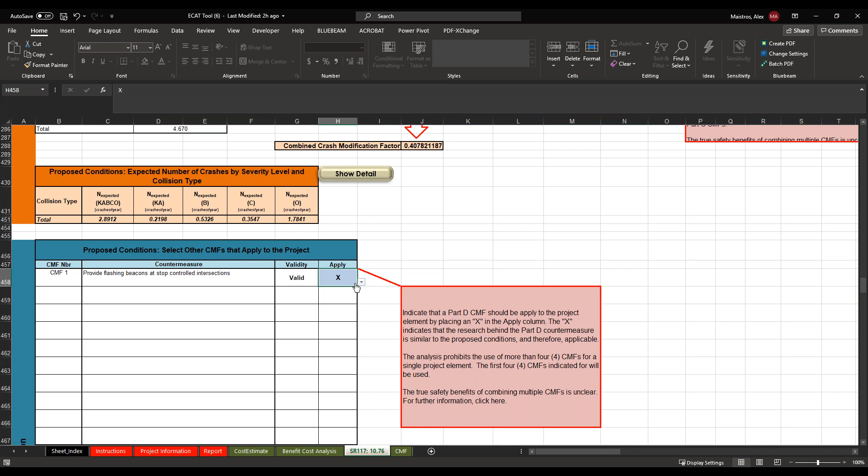But then if we go back to that project element, to our proposed conditions, and keep scrolling down, we can now see here's that Part D CMF we selected. Let's apply it to our site. And as soon as we click that X, it applies it to our site.

And then if we go back to our report, our expected crashes are lowered even more. We were at 2.9 before the Part D, and now we're at 2.6 as the final, by implementing the Part C solutions of adding left turns and realignment, and then the Part D of providing the flashing beacons.

All right, so that's a quick example, beginning to end, of how we could do a full analysis and get the benefit cost ratio. Again, ODOT has a lot of information online to help guide you through the ECAT tool itself, but we want to make sure we are comfortable and have the HSM handy to answer the more technical applications of how we look at any individual site.

Alright Cindy. Before you move on Alex, we do have one question for you. The question is, if you were to come up with multiple countermeasures, is there a way to have separate tabs with each countermeasure, or would you have to re-enter the proposed data for each different option?

That's a great question. You can do it a number of different ways. I'd say the easiest way, if you're going to show different countermeasures, is to just copy and paste your base file. That allows you to have two concurrent versions - if we go with CMF Plan A, it's contained in this Excel document, and if we go with CMF Plan B, it's contained in this document. That'll help keep the cost benefits straight when we start going down the BCA realm, but it will help you from having to keep changing and replicating baseline information.

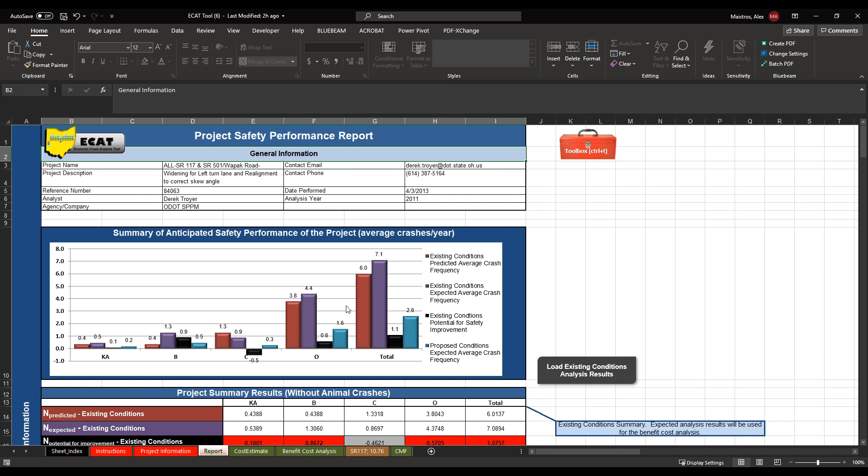The other thing that'll help with is on this project information tab. It'll keep this from getting very cluttered, because if we have the same NLF ID and the same log point, ECAT would struggle to assign those to both sites at the same time. This is really meant for looking at one project at a time, and so I would recommend breaking down to different Excel files.

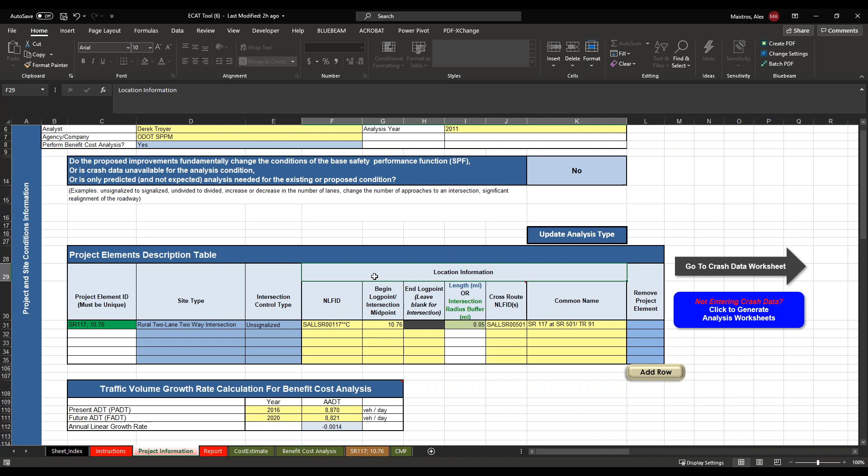That would have been my response as well. I was curious as to what you would think. It's a broad question, but to the point where you were just showing the example that they had, you put one of those countermeasures down below into the mix. If you had multiple countermeasures, if you could scroll down really quickly Alex - if you had multiple countermeasures in the non-site characteristic base, then you could toggle on and off in the individual files in order to move those around.

If you are going to do something that is related to a CMF, such as one of the Part D CMFs, then it wouldn't be changed here. Of course, you would have to change the actual element tab to reflect that difference in that particular condition. But in this case, for the non-site characteristic situations, you could toggle on and off between these different analyses files, correct?

Yes. So basically you could have all of your countermeasures here, but you could just tell it which ones you were going to use for this particular alternative.

Correct. And ECAT, as Derek said it best, really only allows for one alternative to be analyzed at a time. And I'll just add, you can have 4 countermeasures total for any specific site element. After that point, the true safety benefits of adding another one are really unknown, because you're changing the existing site so much. So we limit it to 4. Other states or jurisdictions limit it to 2 or 3, but right now Ohio is limited to 4 at a time.

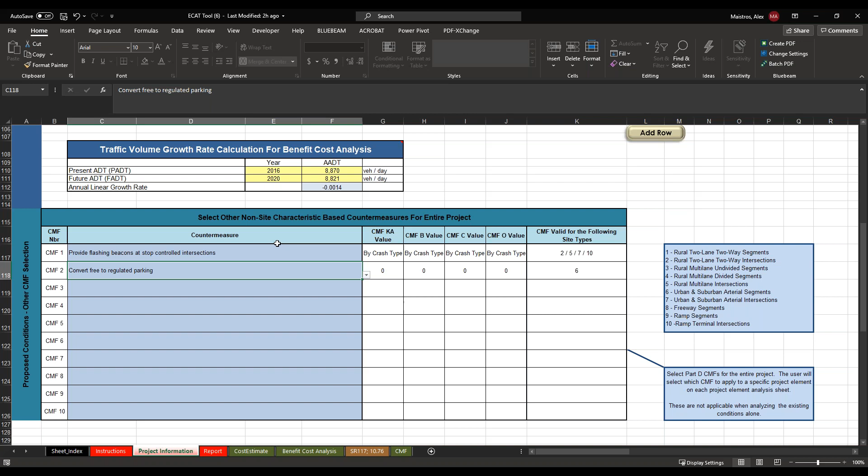And when you're doing this type of analysis, definitely reach out - we're going to repeat this multiple times - to your district safety coordinator if you have a question about that and how to do that. They're your greatest resource in order to figure out how to navigate through ECAT while you're doing the alternatives analysis. So do it while you're actually doing the analysis rather than waiting to the end, and they'll be more than happy to help you. Alex, that was the only question that we had.

Okay great, I'm going to jump back into our presentation then.

So the last step of the process is to develop our plan and finalize our report. Everyone should have the handouts for all 4 of these modules. If not, they're available in the documents portion of the GoToWebinar toolbar. The last portion of this, step 5 in the process, we're going to offer some general guidance and advice on how to put this together, but it's good to keep these notes handy as you're going through scoping and developing your final report.

So again, we're in step 5. We've done all the analysis at this point. Now we need to turn it into a physical and digital safety study.

So we want recommendations to be based on PSI. If we do our analysis and the site does not have a potential for safety improvement, we need to immediately stop and have a conversation. It might be that we document that in the safety analysis, in the safety study, but we definitely want to have that conversation.

Recommendations really should consider engineering, enforcement, driver education, and other factors. I know ECAT and the HSIP process are heavily focused on infrastructure, but this was a conversation that came up, I think maybe in the first module, if not the second. What if we do our CAM tool and there's a lot of alcohol-related crashes? Well, this is how we document. We want to make sure that that's captured and that we're saying, hey, we need to do some coordination efforts, or it's going to be more than just infrastructure.

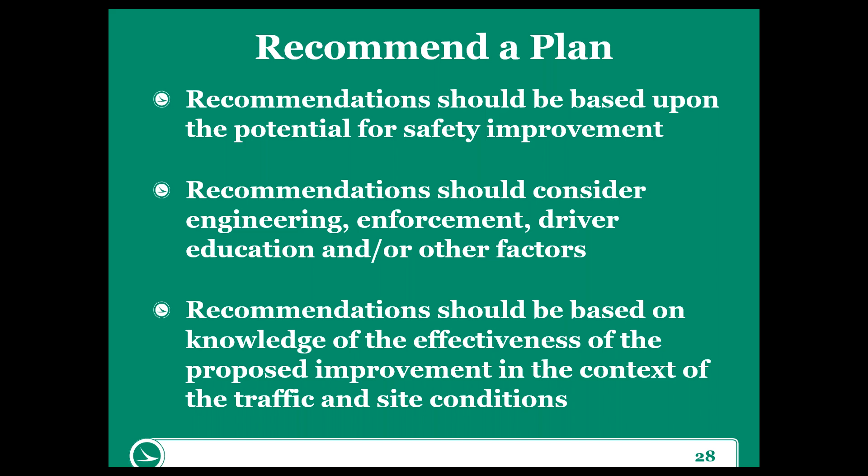So a combination or a different menu of improvements may be the best plan for addressing a location. It may be more than just one fix. It may be an infrastructure and behavioral combination. But the big thing is all practical improvements, including doing nothing, should be identified and considered and analyzed.

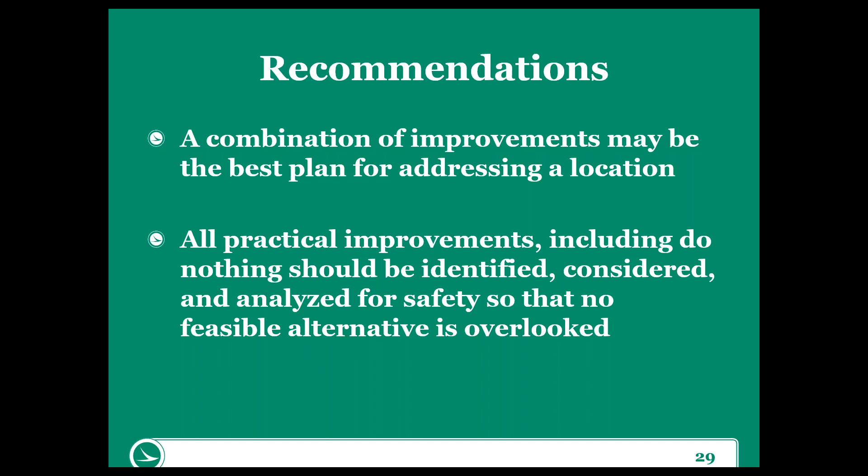So if the only solutions are really expensive long-term solutions for addressing our particular crash type, we need to have that conversation in the safety study and talk about, in the short term, what does it mean to do nothing? And what are the alternatives to kind of work past that do nothing? And even though an alternative may not be desirable by the city or DSRT, it's still probably good to mention that, hey, we talked about this and it was not included for reasons X, Y, and Z.

So there's 2 study report formats: the full study and the abbreviated study. This is definitely something that'll be discussed, if not before, at the scoping meeting. Full studies are typically what we're doing as consultants and in support of local agencies or state projects. The abbreviated studies are really, those are usually coming from central office on-call contracts, or for situations where we know that a full study has been done and we're really going back just to update that full study and see what's happened in the few years since that study took place.

So we'll go through each of these elements for the full study: title page, the 1-page project summary, which is a requirement for funding as well. Our executive summary, including purpose, background, overview of possible causes, and then recommendations and costs. We'll have a purpose and needs section, existing conditions, crash data, and then our crash analyses.

We'll then talk about other transportation analyses and results, which is the summary of the relevant traffic studies. Our proposed countermeasure evaluation, which is where we'll talk about the countermeasure descriptions and what is their potential for improvement. So what is their proven effectiveness? And then we'll talk about the countermeasure cost analysis, and then our benefit cost analysis results.

And you can see how a lot of this is going to come from selecting appropriate countermeasures, identifying their related CMFs, developing a cost estimate, and then running through ECAT. And finally, we'll include conclusions and recommendations and prioritization.

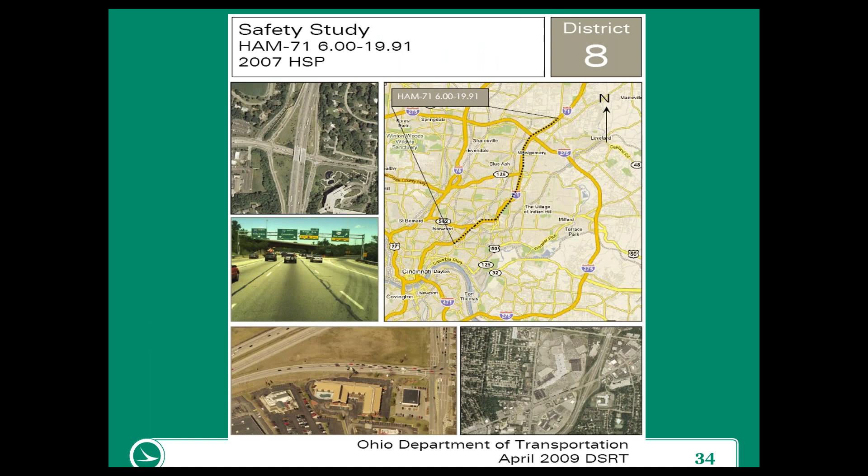And here's just one example of a good looking title page.

So the one-page project summary, this is really where we're trying to convey everything in one kind of engineering-size drawing. We need the basics for the project information and location, highlight any relevant existing conditions, any major crash patterns, and what are the recommended solutions. So this is one graphic-driven page to kind of capture the entire safety study.

And the other information that's in here is really what's driving this safety study. If you're having a lot of crashes and it really is due to a capacity issue, then maybe you want to include that capacity analysis, or any relevant information to really and quickly show this is why we need this project. In this situation, the recommendation, I would say, we want to be graphic driven.

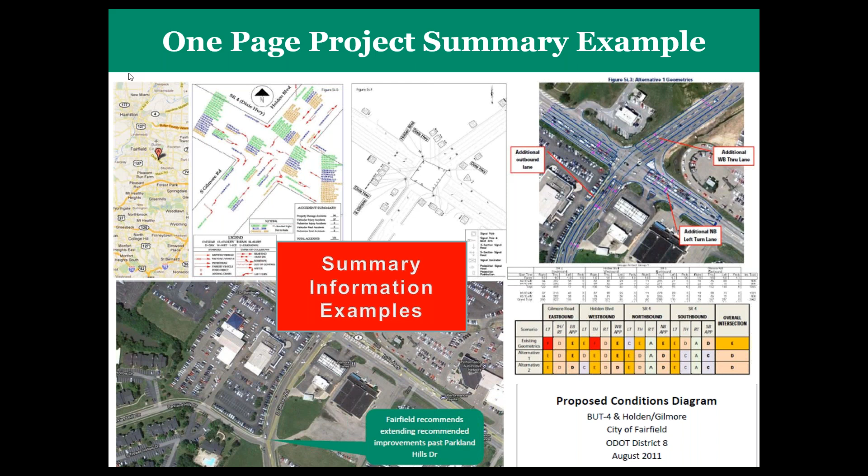Let's not worry about adding too much summary text to these. It should be really easy to glance through and understand - okay, I see where we're at, I see what the problem is, and I see where we're requesting funding or where we're proposing to go in terms of alternatives.

So this is another one. You can see these are all very much along the lines of a quick summary poster presentation.

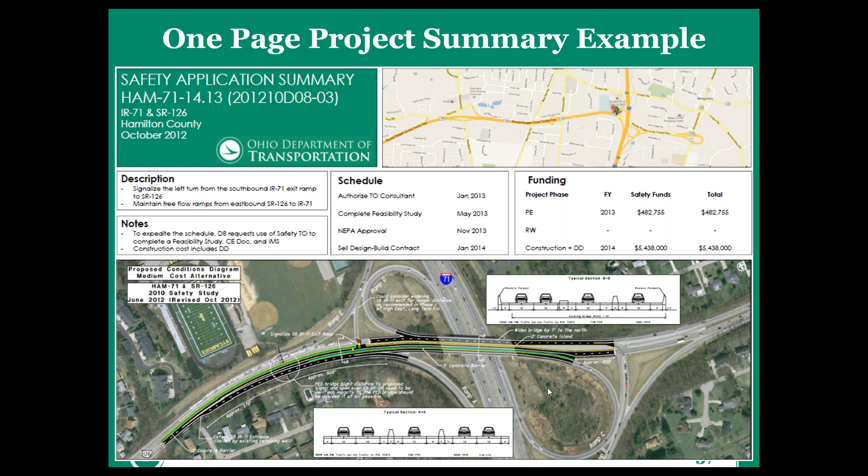And so we have, again, this is where we have our alternative overlaid over aerial imagery. We're showing typical sections in the proposed conditions. But again, very simple, not clouding it with too much detail.

So in our executive summary, we need to make sure that it is brief, it is to the point, and it conveys all of the relevant results about the safety study, which again, we'll follow in the full safety study itself. This is something that we have to add.

It's not something that we add as like, well, this would be nice if we could get an executive summary, but we don't need it. It's definitely something we want to make sure we get in there and that it's complete in both background, purpose, overview of the possible causes, and then what are the recommendations.

All right, so the first actual section of the main body of the document is our purpose and need statement. And this is - why did we study this location to begin with? And when we started looking at this study, what popped up in terms of the need for implementing countermeasures?

Things that we want to include generally in the purpose and need is if there's a safety analyst ranking or another network screening - let's say it was on an MPO list or something like that - we want to include that in here, and that's why this came up. We want to talk about when we did the crash analysis, look at these are the issues in terms of safety based on numbers.

And then we also want to bring in that potential for safety improvement. Major thing about the purpose and need statement is it should not cover countermeasures or proposed solutions. We'll get to that in the report. This is really just teeing up why we're here and what the safety problem is.

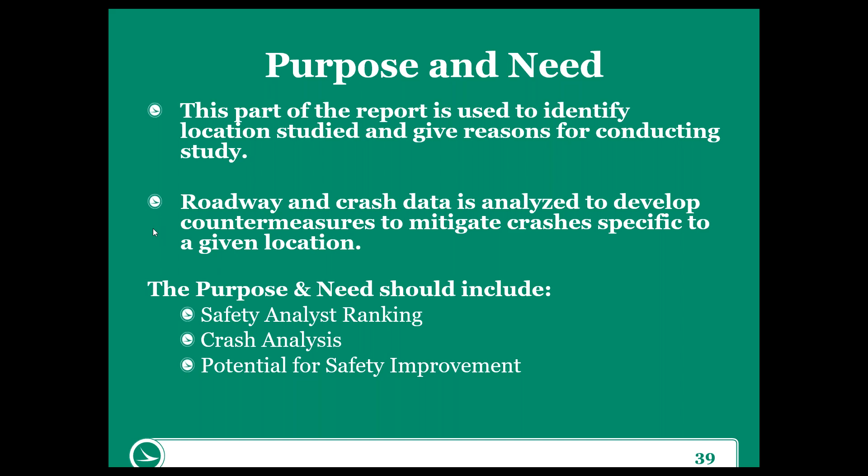So in our existing conditions, I think the tendency is that there's a lot of conditions at any given site. So let's focus on the ones that are relevant and impacting safety, or the ones that are explicitly not impacting safety.

So if the site is really well lit, we did a daylight and a nighttime site field visit, and we know that it's really well lit, then we're going to want to document that there. So we're not going to start wondering like, well, is the lighting sufficient? But we definitely want to talk about the obvious background stuff - where is it, this in detail a little bit more, what type of facility are we talking about. Let's set the table for what analysis is appropriate.

I just want to talk about the history of traffic control and the history of crashes. Why did we get here? It's in the purpose and need, but let's include the previous improvements, not just the immediate history. Has the site been studied? Did we understand there was a crash problem? What was done previously to address crashes? Again, this is at a high level.

What's going on with our conditions diagram - we talked about that last week, but we want to include the conditions diagram in the existing conditions, which was covered in module 2. Again, this is a full list of potential things. If it's applicable to our site, we want to include it, but let's not worry about checking every single box in our existing conditions diagram.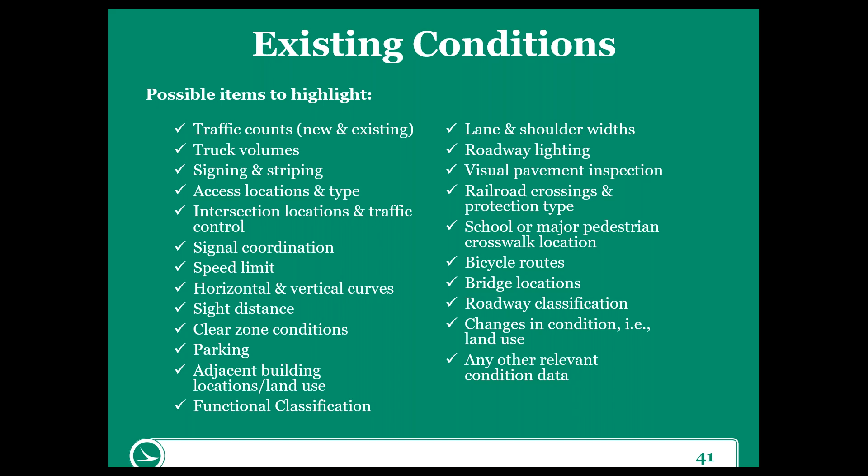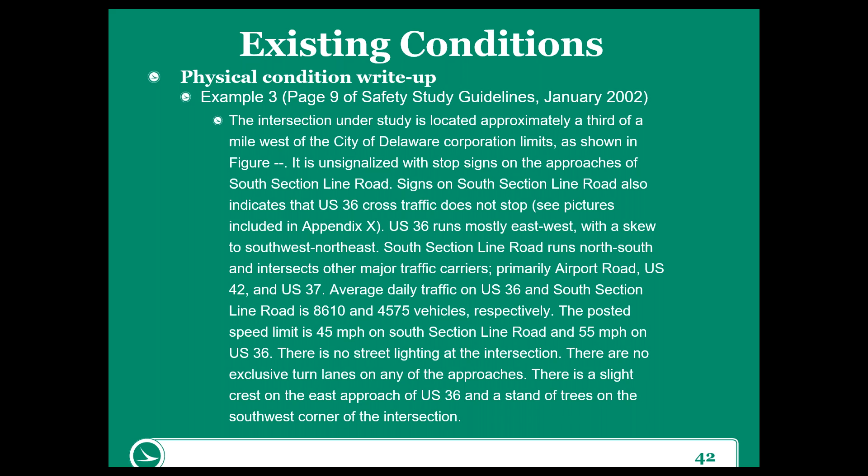Similarly, we need a physical conditions write-up. This is one example. Hopefully everyone can take the time to read this in the slides, but we want to be succinct and not cover extraneous details - we need a narrative of what's going on out there. All right, so that's all in terms of physical conditions.

You'll note crash data - we're going to go over our crash diagram. This is where we would include that. We talked about the crash diagram back in module 2. A general crash summary, and we're talking more of a narrative - what are those bullets that we developed in the crash analysis process back in step 1?

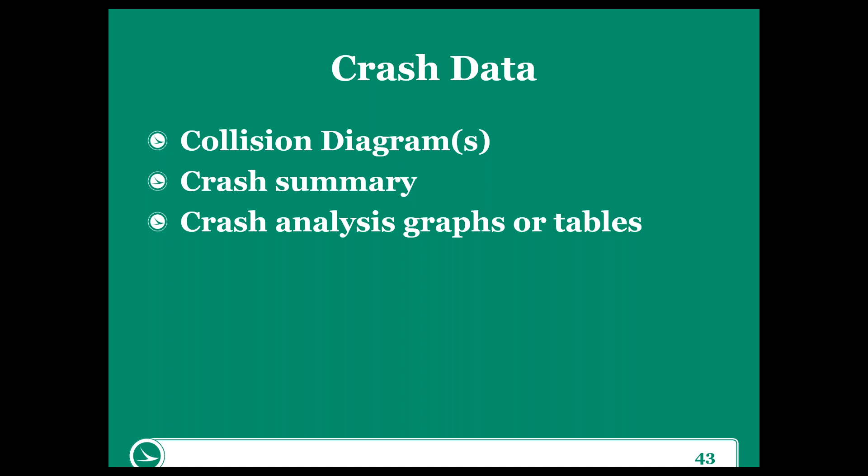In step 1, we also developed a lot of analysis graphs or tables, and we want to make sure we're including those as needed in the body of the report. We covered last Friday that we shouldn't overwhelm the report with every chart we can make. We want to use what we need to convey the purpose and need of the study, but again, this is a list of potential things to include.

One of the other things in terms of countermeasures - there are a lot of different sources, but let's make sure we're considering a wide range instead of going into the study saying we want a roundabout without considering other alternatives. Make sure you're familiar with a larger body of countermeasures and strategies, along the lines of national publications, the Highway Safety Manual itself, CMF Clearinghouse, NCHRP and FHWA reports, and past implementations also help.

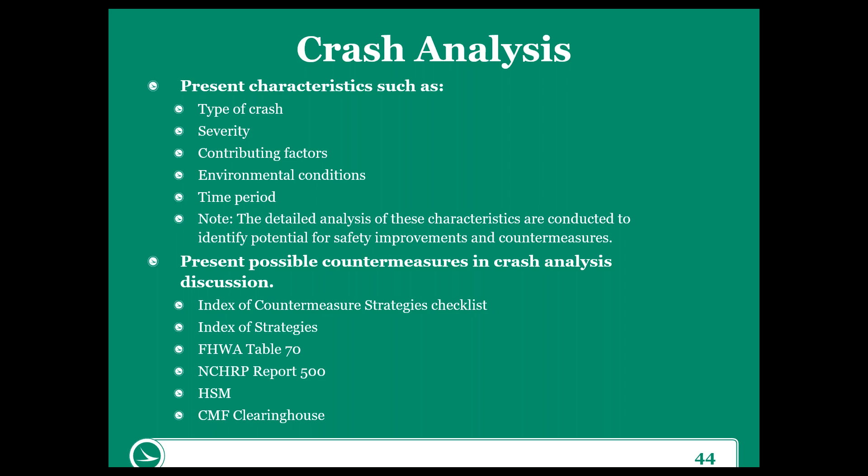Once we talk about our crash analysis, this is a good time to bring in those other analyses from step 3. We want to show the results of those other analyses in the main body of the document without going into too much detail. We want to say why we conducted these analyses and how they impact the safety performance of the site. We can mention what data was collected and how it was analyzed, but those details should be left to the appendix - we're just looking for the summary of the results and the correlation to crash patterns and countermeasures.

The next section of the full report is the proposed countermeasures evaluation. This is where we want to discuss all evaluated countermeasures and identify proposed countermeasures - discuss them all, even if they haven't been pushed forward to implementation or cost analysis. It's a great time to talk about why we're not entertaining certain countermeasures. Those questions will come up in the future, possibly when applying for safety funding, so it's always good to have that documented.

In terms of developing cost estimates, we want to determine cost estimates for all recommended countermeasures. We can identify potential countermeasures, but if those aren't going to be recommended for implementation, let's not waste time developing those costs. If there are immediate barriers to using them, we don't need to develop and present a cost here.

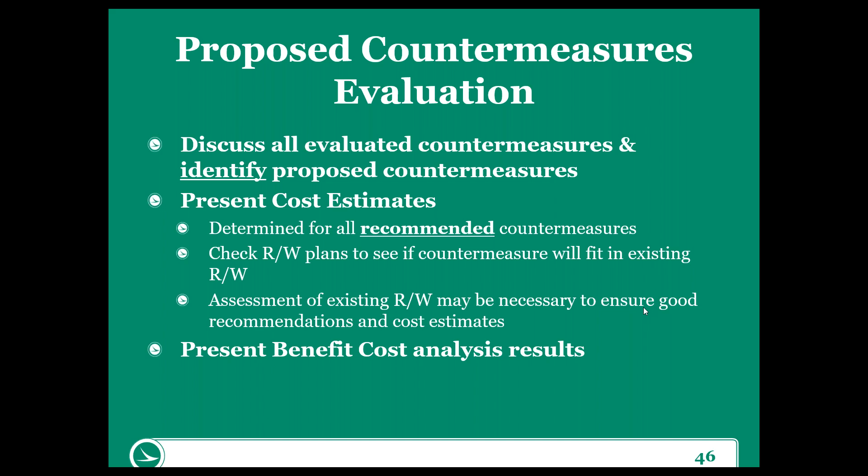And so then again, after that, we want to present the benefit cost analysis results. To be honest, those should be pretty well summarized in ECAT for the report itself.

And in conclusions, let's come up with a summary, definitely shorter than our executive summary at the beginning. But why were the crashes occurring? What infrastructure deficiencies were related to the crashes? What was the body of countermeasures evaluated? Why were they dismissed?

We really just want to talk about when we get to recommendations and prioritization. The conclusions need to say, this is everything that we considered, this is why we're here, and this is why we didn't include certain countermeasures for recommendations, despite the fact that they're identified.

Recommendations and prioritization is now, okay, of all the countermeasures that we looked at, these are the ones that we want to implement. And we would recommend implementing these.

A range of strategies is generally what we want to talk about, both in terms of short-term countermeasures, so under a year, medium term, which is 1 to 5 years, and long-term, which is over 5 years. That can help us develop an implementation strategy. So let's do the short-term, low-cost things now, reevaluate the baseline safety performance a little bit down the road, and then have that long-term solution teed up, ready to go.

But we also want to make sure we're discussing the effectiveness of these different alternatives and then how they're going to impact traffic and site conditions.

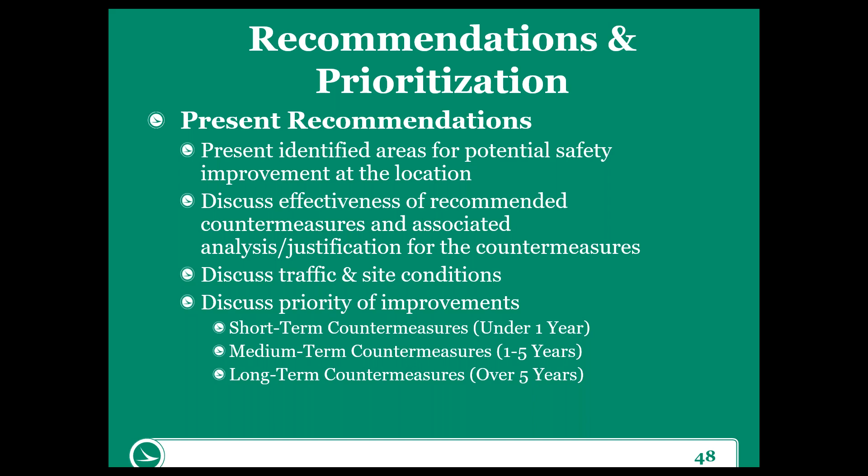So the proposed conditions diagram, we saw one in the one-page summaries. These are great ways to convey here's what we want to do. Again, we're looking at planning level sketches here, not design documents, but it helps to show where our current existing right-of-way is. Here we can see that...

The widening that we're proposing here is going to leave the existing available right-of-way, so there's going to be an acquisition needed. But overlaying the design or the proposed conditions over aerial imagery is definitely the easiest way to say here's what was out there and here's what we're proposing.

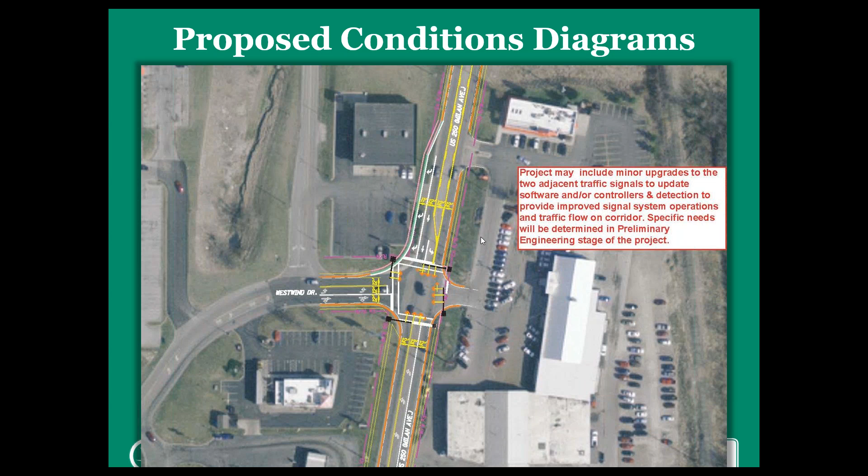The proposed conditions diagrams, again, can be a little bit more comprehensive if we have a lot more going on. It's really right-sizing the need for this with the local highway agency and with DSRT.

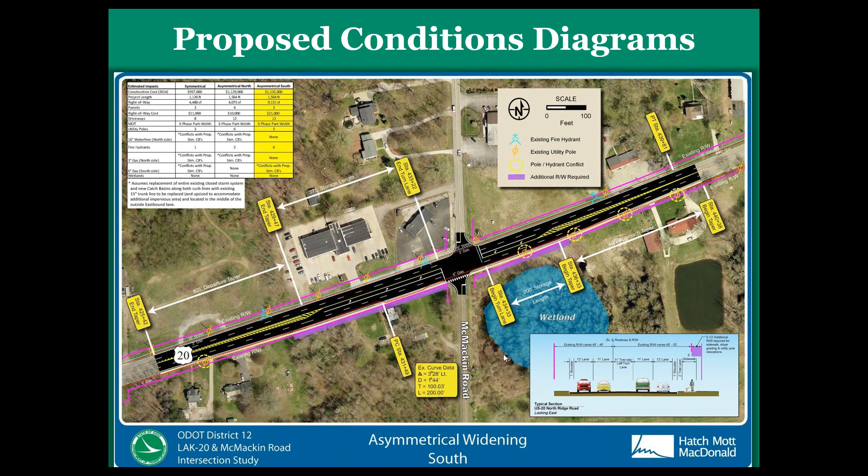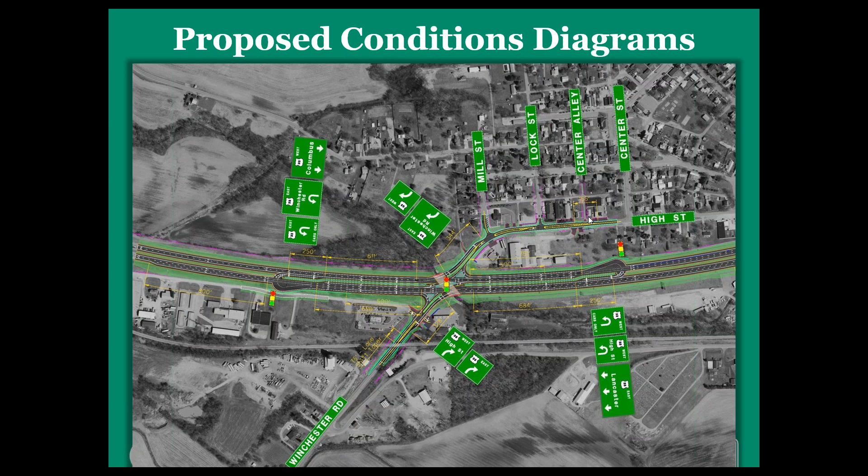Here's another proposed conditions diagram. This is for either an R-cut or a median U-turn. I can't say I've looked long enough to know, but we can see that this is a little bit more complicated in terms of the line work and identifying signs and streets, but not a whole lot of information in terms of the nitty-gritty.

We've talked about appendices earlier, but definitely want to include traffic counts if they were done. That helps you in the future, helps the local agencies in the future, helps district, everyone, when they refer back to this project, having those traffic counts available will help to understand how that has changed.

Crash data reports if requested, so the CAM tool output, and then other data, other traffic and safety data analysis. Again, we've covered this briefly when we were going through the contents, but the biggest thing with the appendices is include what's important and valid, but don't unnecessarily add to the length of the report by including things that don't directly tie to results or conclusions of the safety study.

So the abbreviated study format is obviously slightly shorter, but the general default is that we're going to assume that we're doing a full study until ODOT or district or perhaps our local partners specifically tell us that we're going to go with an abbreviated study. Usually this is held to internal reports or task order contracts only.

So in this case, we have the title page, overview, implementation, and then appendices. We're really cutting down on the extended descriptions of why we're here. Generally speaking, we know why we're here, but we're just trying to get to what's a high-level overview and what countermeasures are we recommending and why. Title page is the same as the full format.